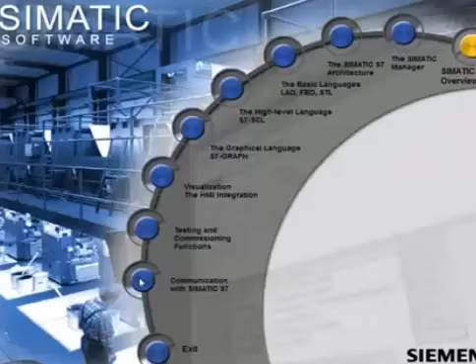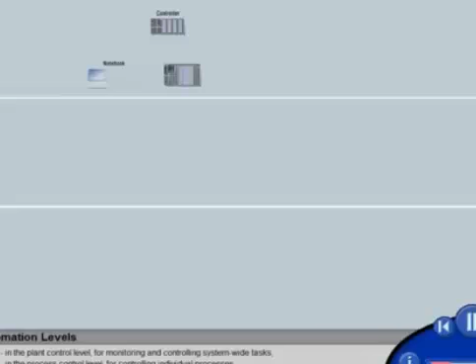In today's automation world, the requirements for a system are manifold and complex. Consistency across all three automation levels regarding information processing and communication are a prerequisite for successful realization of a plant: the plant control level for monitoring and controlling system-wide tasks, the process control level for controlling individual processes, and the field level for direct data recording and influencing the process.

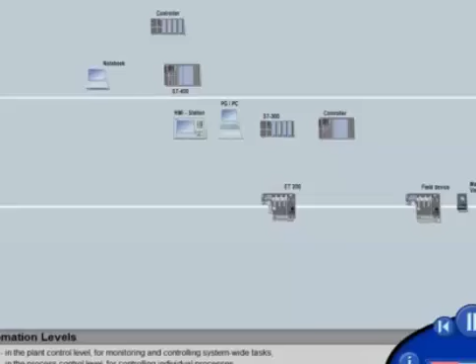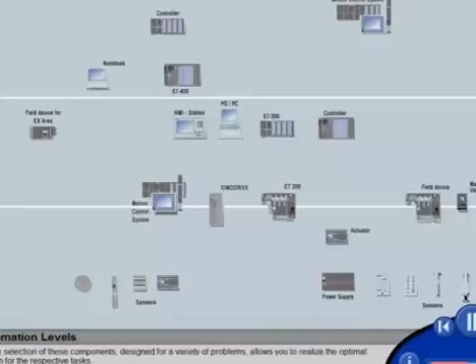A large selection of these components, designed for a variety of problems, allows you to realize the optimal solution for the respective task. For communication between individual components, SIMATIC S7 offers a number of standardized, openly defined bus systems, tailored to the respective application area.

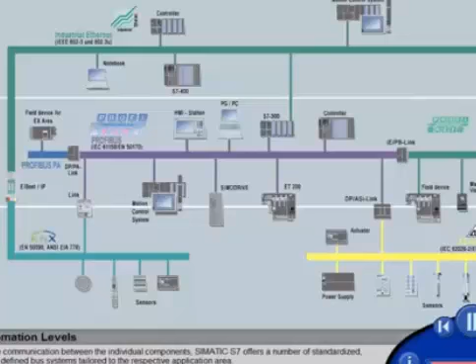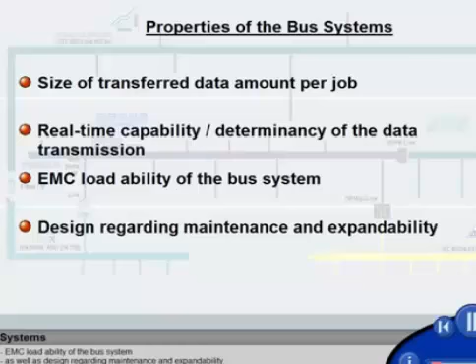These bus systems and their use for a certain task are evaluated by four basic properties: size of transferred data amount per job, real-time capability or determinancy of the data transfer, EMC loadability of the bus system, as well as design regarding maintenance and expandability.

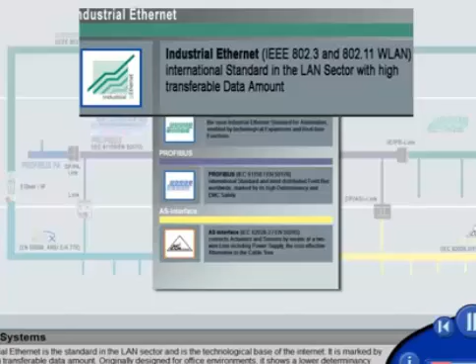Industrial Ethernet is the standard in the LAN sector and is the technological base of the Internet. It is marked by its high transferable data amount. Originally designed for office environments, it shows a lower determinancy and EMC loadability.

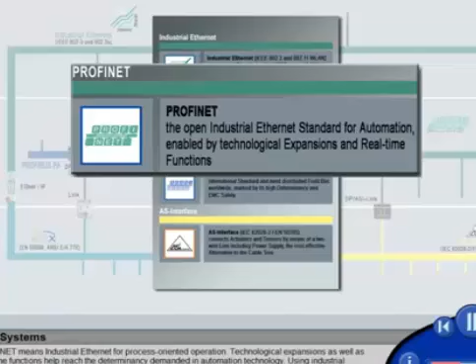Profinet means Industrial Ethernet for process-oriented operation. Technological expansions, as well as real-time functions, help reach the determinancy demanded in automation technology. Using industrial components even enables application in field-related areas.

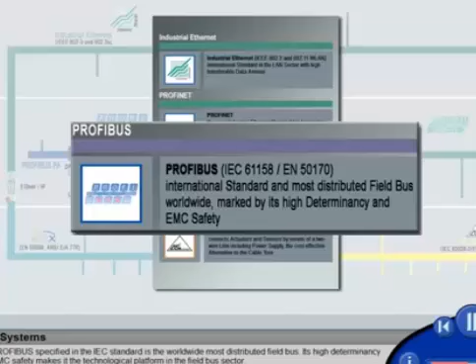The Profibus specified in the IEC standard is the worldwide most distributed field bus. Its high determinancy and EMC safety makes it the technological platform in the field bus sector.

In the actuator and sensor communication sector, the AS-i bus system offers a cost-effective alternative to the cable tree. It connects simple actuators and sensors by means of a two-wire line, via which data and energy is transmitted, and simplifies maintenance and later expansion.

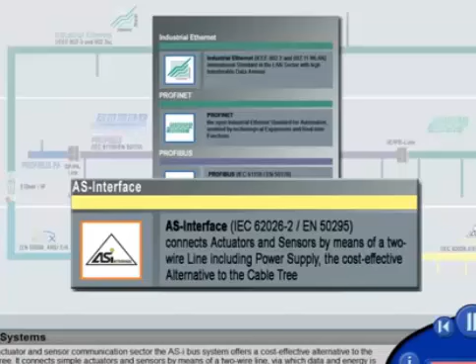Apart from selecting the bus system, the type of communication also plays an important role. The communication functions of a SIMATIC S7 controller are divided into three classes.

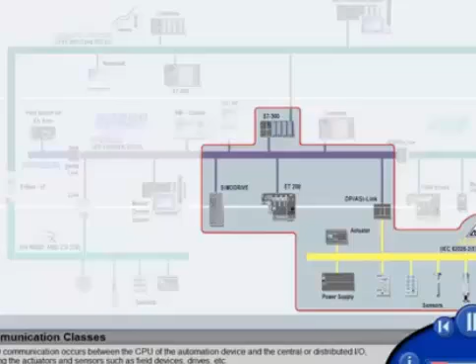The I/O communication occurs between the CPU of the automation device and the central or distributed I/O, meaning the actuators and sensors such as field devices, drives.

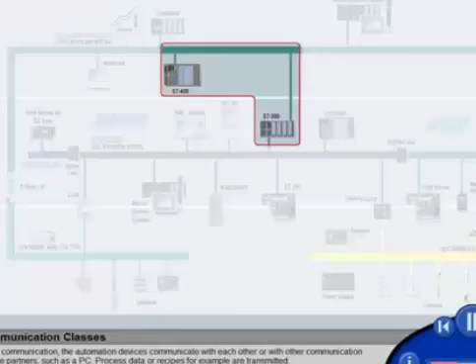In data communication, the automation devices communicate with each other or with other communication-capable partners, such as a PC. Process data, or recipes for example, are transmitted.

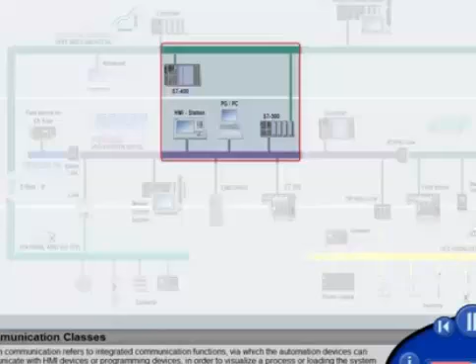System communication refers to integrated communication functions, via which the automation devices can communicate with HMI devices or programming devices, in order to visualize a process or load the system configuration into the CPU of the automation device.

In the course of this demonstration system, we will discuss the communication classes in greater detail by means of a selected configuration and application sequence.

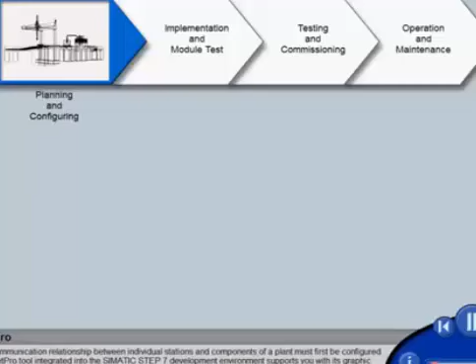The communication relationship between individual stations and components of a plant must first be configured. The NetPro tool, integrated into the SIMATIC Step 7 development environment, supports you with its graphic procedure and clear display.

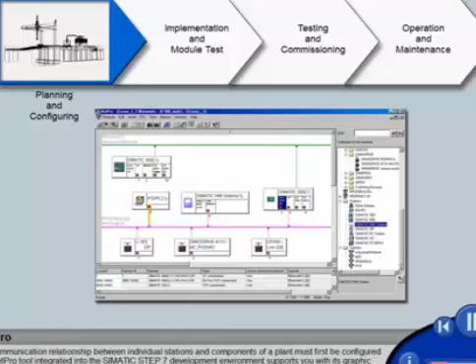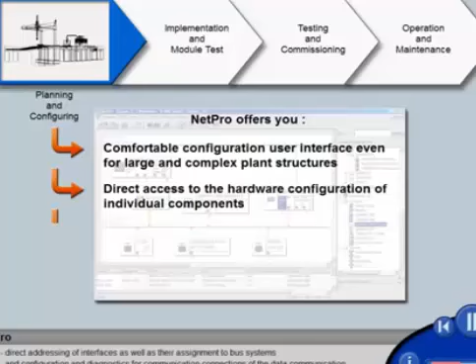NetPro offers you a comfortable configuration user interface, even for large and complex plant structures, direct access to the hardware configuration of individual components, direct addressing of interfaces as well as their assignment to bus systems, and configuration and diagnostics for communication connections of the data communication.

In the following examples, we show you the configuration of the three communication classes, namely I/O, data, and system communication.

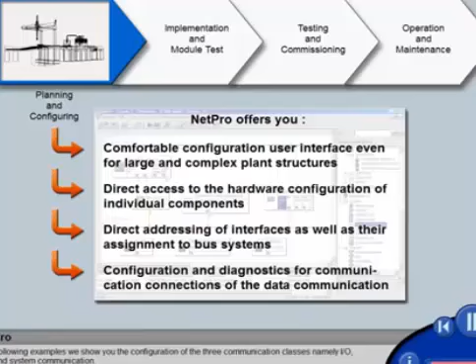We start with configuring the I/O communication. Due to the data exchange with actuators and sensors, it is closest to the process. In this case, we use an S7-300 CPU as Profibus DP master.

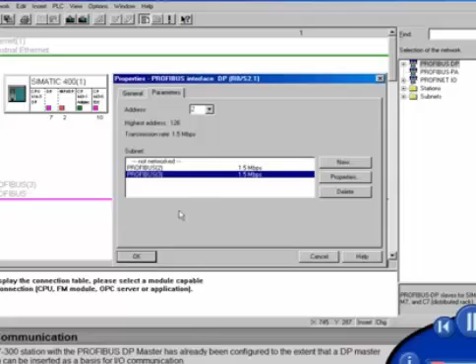Three DP slaves will be assigned to it: an I/O module, a drive module, and a connection to the AS-i bus. The S7-300 station with the Profibus DP master has already been configured to the extent that a DP master system can be inserted as a basis for I/O communication.

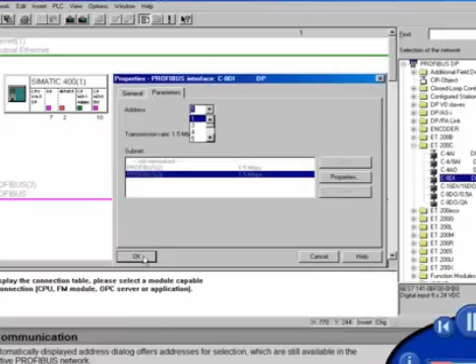Subsequently, we select the desired DP slave from the hardware catalog and connect it to the master system. The automatically displayed address dialog offers addresses for selection, which are still available in the respective Profibus network. Even for complex slaves, such as drives or a network transition, the allocation to Profibus net and DP master occurs in the same way.

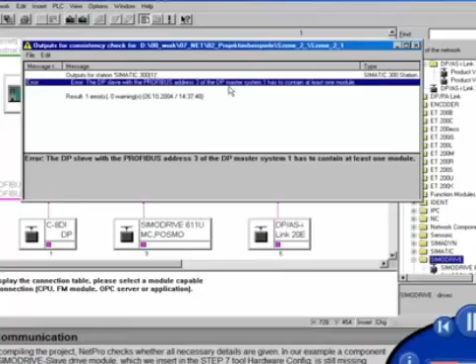When compiling the project, NetPro checks whether all necessary details are given. In our example, a component in the SIMODRIVE slave drive module, which we insert in the STEP 7 tool hardware config, is still missing. Here, the hardware catalog offers us all components permitted for insertion into the slave.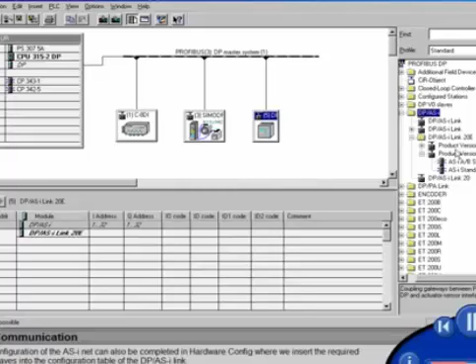The configuration of the ASI net can also be completed in hardware config, where we insert the required ASI slaves into the configuration table of the DP ASI link.

For components not listed in the hardware catalog, or only listed in an older version, module information may be available some other way. Hardware updates of SIMATIC products or GSD files of external products can simply be included here.

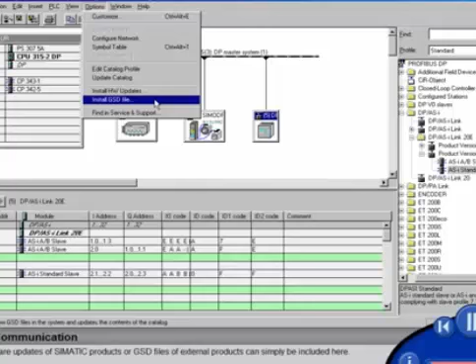In order to complete the configuration, we update the database of stations and buses for the entire project by means of save and compile.

Apart from compiling I/O data, automation devices must also be able to communicate with each other. This is achieved by means of data communication.

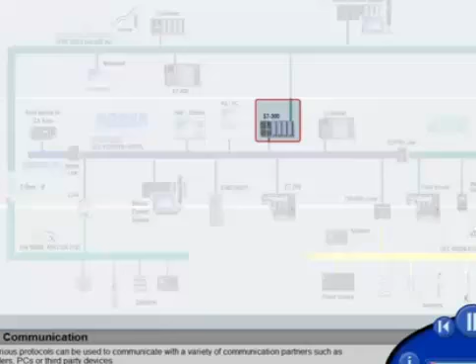The various protocols can be used to communicate with a variety of communication partners, such as controllers, PCs, or third-party devices. An example are protocols such as FDL and FMS on the basis of Profibus, as well as the ISO transport or TCP/IP on industrial Ethernet.

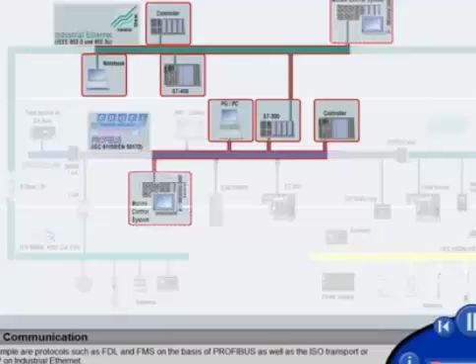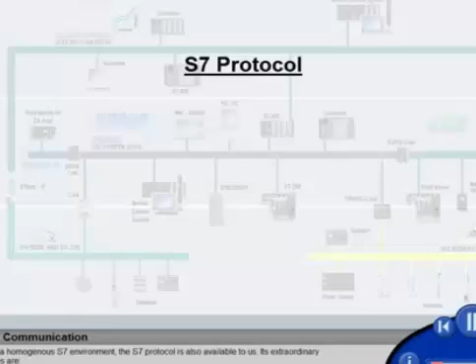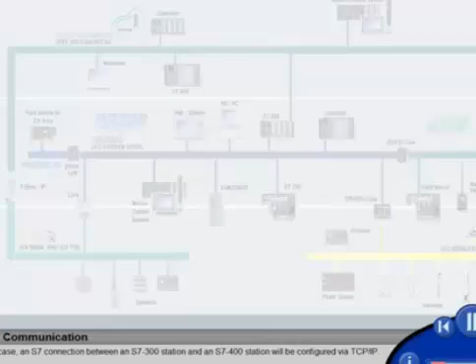Within a homogeneous S7 environment, the S7 protocol is also available to us. Its extraordinary features are simple configuration, transmission of different data types, and independency of the bus system used. In this case, an S7 connection between an S7-300 station and an S7-400 station will be configured via TCP/IP.

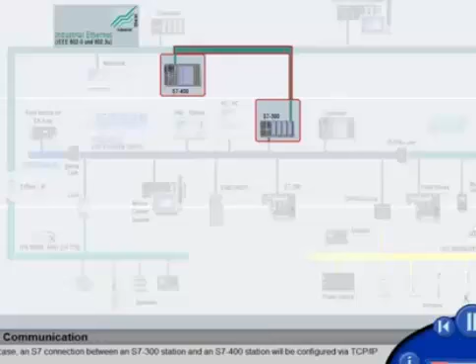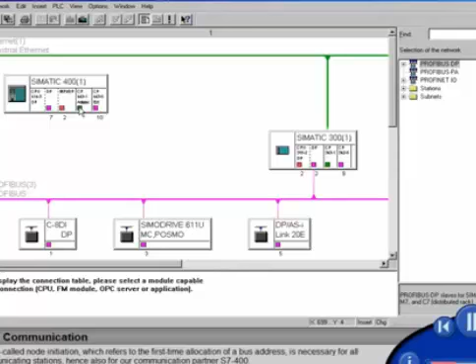NetPro is again used for interconnecting the involved stations as well as the connection configuration. Networking can be accomplished in an uncomplicated and clearly displayed graphical manner by connecting the respective communication interface with the desired network. The node initiation, referring to the first-time allocation of a bus address, is necessary for all communicating stations, hence also for our communication partner S7-400.

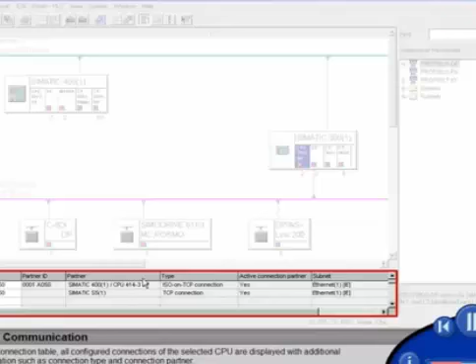In order to insert a connection, we select the CPU of the affected controller. In the connection table, all configured connections of the selected CPU are displayed with additional information, such as connection type and connection partner. The connection wizard is called to insert a new connection.

As a connection partner, we select the S7-400 station from our current project. Alternatively, the connection partner could also be part of a different project. Furthermore, it is possible to use a component unknown within Step 7, which must then be specified more precisely by the user regarding its connection properties.

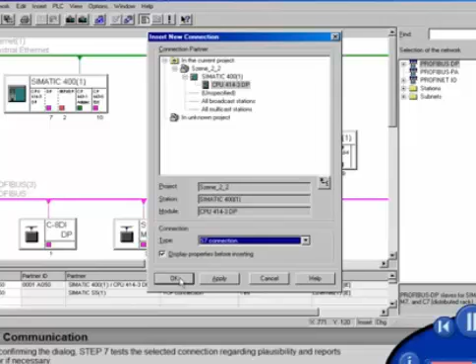We select an S7 connection from the list of connection types available in Step 7. When confirming the dialog, Step 7 tests the selected connection regarding plausibility and reports an error if necessary. If no errors occur, the properties dialog of the connection opens.

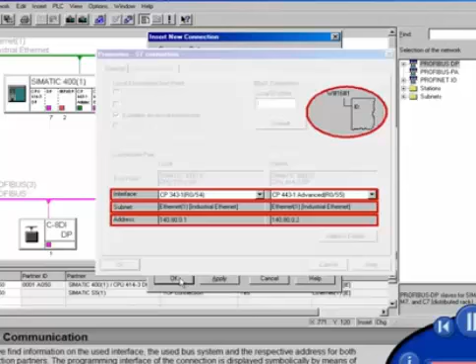Here we find information on the used interface, the used bus system, and the respective address for both connection partners. The programming interface of the connection is displayed symbolically by means of block parameters. The save and compile function completes the configuration of the communication connections.

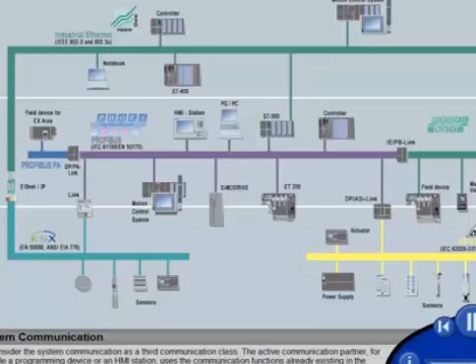We consider the system communication as a third communication class. The active communication partner, for example a programming device or an HMI station, uses the communication functions already existing in the operating system of the controller.

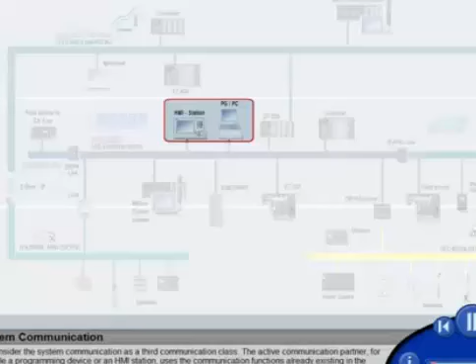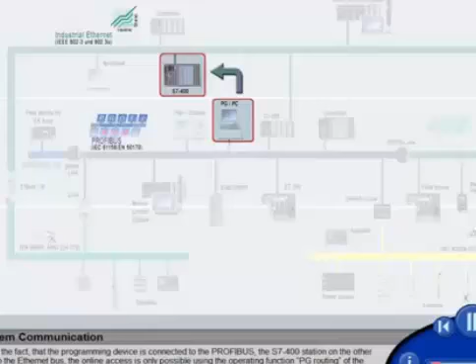As a first example, we are loading a user program into the CPU of the S7-400 station. Due to the fact that the programming device is connected to the Profibus, while the S7-400 station is connected to the Ethernet bus, online access is only possible using the operating function PG routing of the S7-300 station.

Within NetPro, we insert our programming device into the project. The Properties dialog lists the interface configurations possible for the programming device. Intending to connect the programming device to the Profibus network, we first add a new Profibus interface.

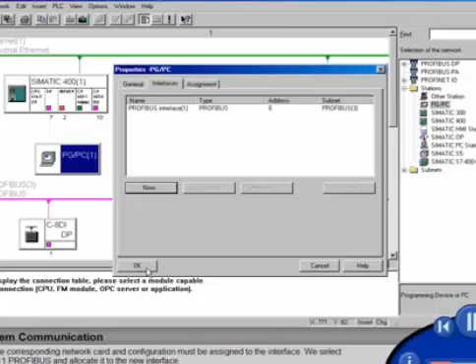The node initiation occurs by selecting the Profibus network and determining the address. The address field automatically displays the remaining free addresses. Now the corresponding network card and configuration must be assigned to the interface.

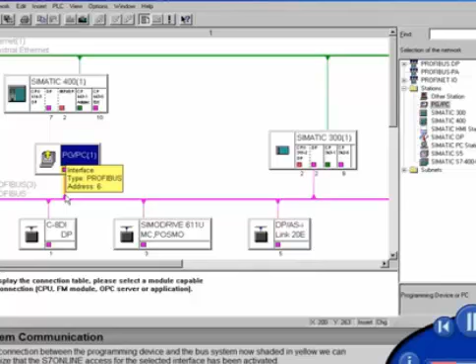We select CP5611 Profibus and allocate it to the new interface. At the connection between the programming device and the bus system, now shaded in yellow, we can recognize that the S7 online access for the selected interface has been activated.

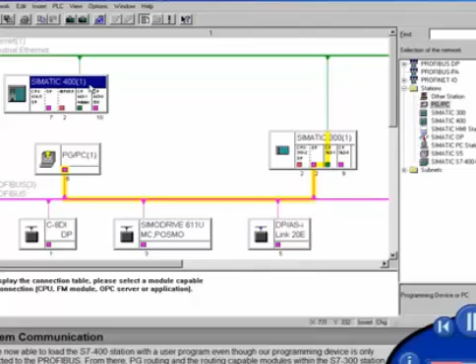We are now able to load the S7-400 station with a user program, even though our programming device is only connected to the Profibus. From there, PG routing and the routing-capable modules within the S7-300 station enable us to reach the station to be loaded via the industrial Ethernet bus.

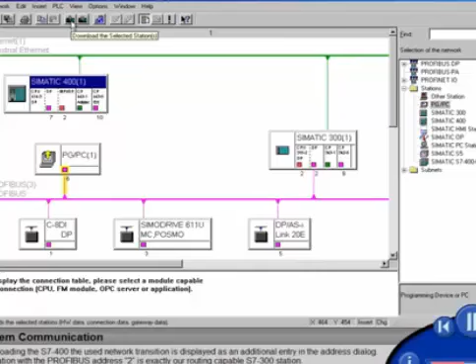When loading the S7-400, the used network transition is displayed as an additional entry in the address dialog. The station with the Profibus address 2 is exactly our routing-capable S7-300 station.

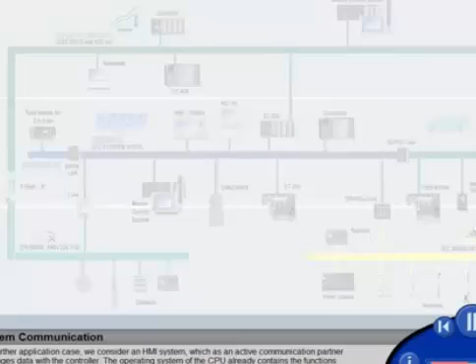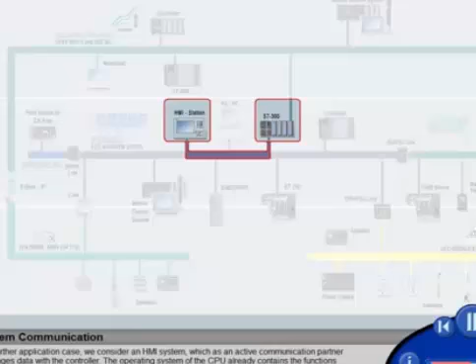As a further application case, we consider an HMI system which, as an active communication partner, exchanges data with the controller. The operating system of the CPU already contains the functions necessary for it. Equal to the programming device, the HMI station is first inserted into the project. The interface with the bus system already exists and must therefore not be configured.

The node initiation can be performed in a simple graphical manner by connecting the communication interface with the Profibus. Saving and compiling the project accepts the communication data into the joint database. It is then available, for example, for the configuration of the visualization WinCC Flexible.

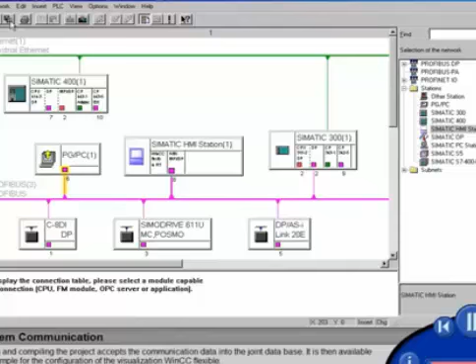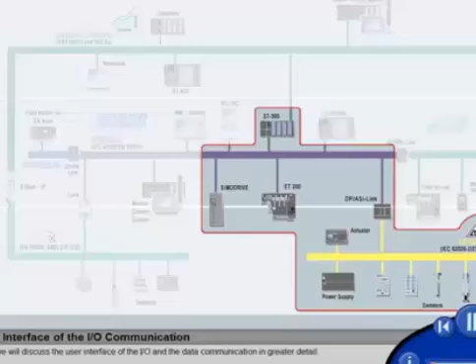Next, we will discuss the user interface of the I/O and the data communication in greater detail. For the I/O communication, the data of the I/O devices are cyclically updated in the DP master by means of the master-slave method used for Profibus DP.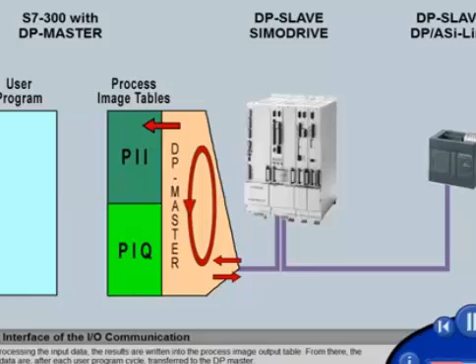Prior to each cycle of the user program, the current input data of the I/O are, from the DP master, loaded into the process image input table. After processing the input data, the results are written into the process image output table. From there, the output data are, after each user program cycle, transferred to the DP master.

The access to the process images occurs per byte, word or double word by means of load and transfer commands, or bit by bit using logic operations.

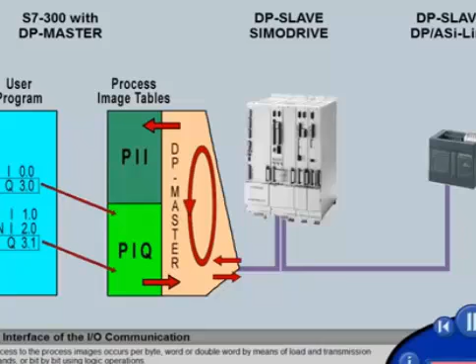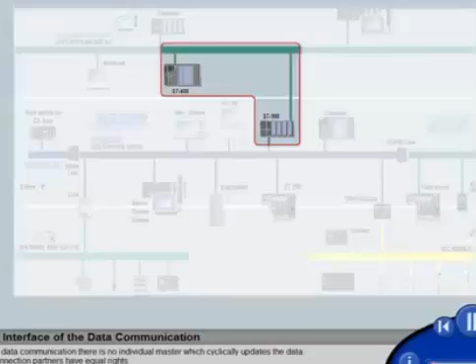During data communication, there is no individual master which cyclically updates the data. The connection partners have equal rights. The configuration defines one partner as the active station that makes the connection.

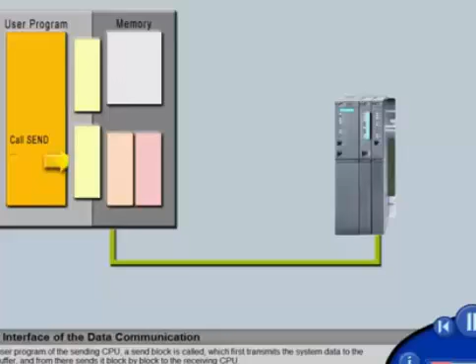Sending the data can equally be triggered off by both partners. In the user program of the sending CPU, a send block is called, which first transmits the system data to the send buffer, and from there sends it block by block to the receiving CPU.

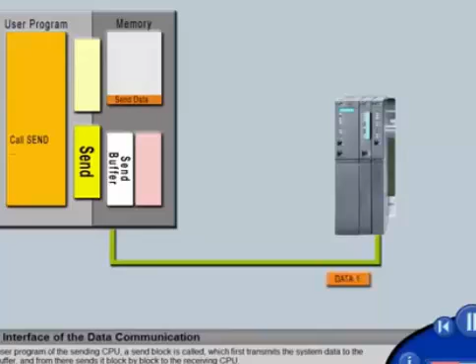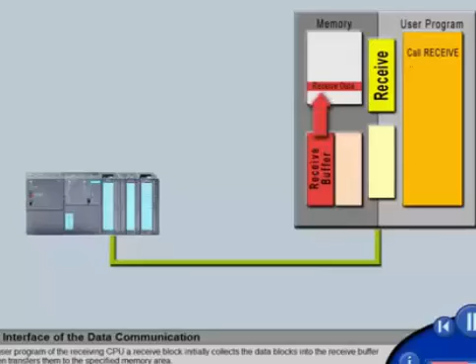In the user program of the receiving CPU, a receive block initially collects the data blocks into the receive buffer and then transfers them to the specified memory area. Due to the bidirectional nature of the connections between two S7 CPUs, both CPUs can send and receive at the same time.

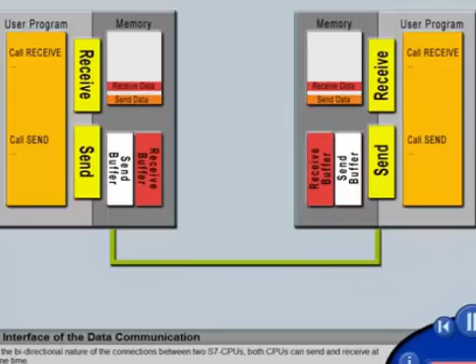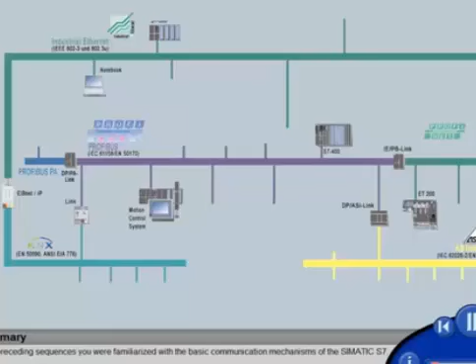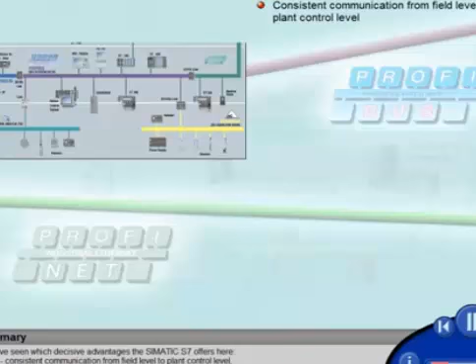In the preceding sequences, you were familiarized with the basic communication mechanisms of the SIMATIC S7. You have seen which decisive advantages the SIMATIC S7 offers here: consistent communication from field level to plant control level, flexible application options of various standard bus systems, a clearly displayed graphical configuration with NetPro, and simple communication programming within the user program.